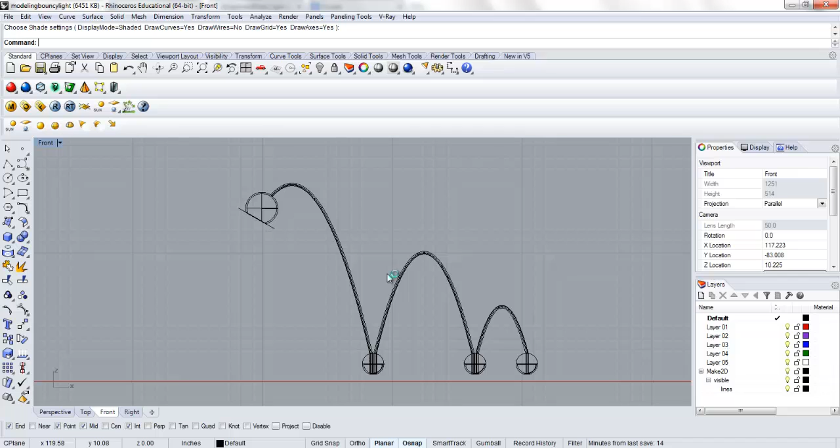Alright, so this tutorial is going to go through setting up your planar drawings. So you've obviously gotten this to a point where you've started to model this. I'm just going to go ahead and steal Alex's, since she sent me her stuff for 3D printing.

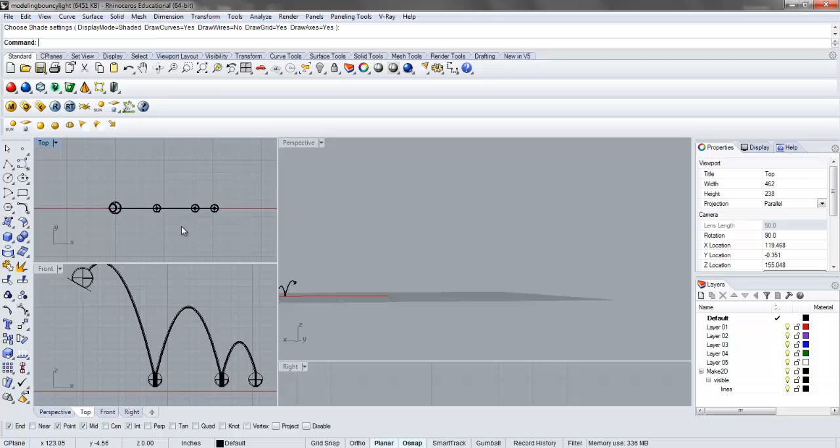So what we're going to be looking at is I'm going to go into an elevation view, and I can go into a plan view for this. I'm going to set this up so that we can actually get these guys out, and do this all at once to make it easier on us. So I take this, first I need to set up an elevation, and I'm just going to copy this away — you'll see why in a second.

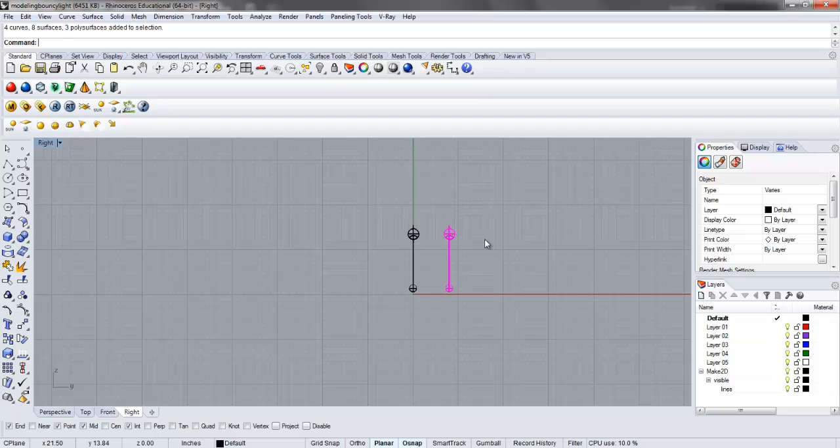Since the drawing requirements dictate it's going to be a plan and an elevation, I can go ahead and rotate this up, and get these all together at the same time. There's going to be a reason for this, and I'll show you here in a second.

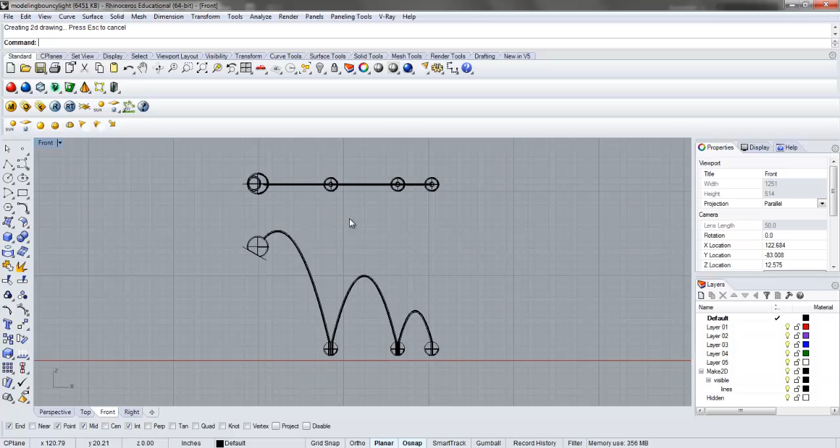Since there's two copies of this, I can use the Make2D command and just make this 2D. What that's going to do, as I go into my plan view now, is take and render out all of the lines here, and divide this up into hidden layers as well, so I can see the guts of this if I want.

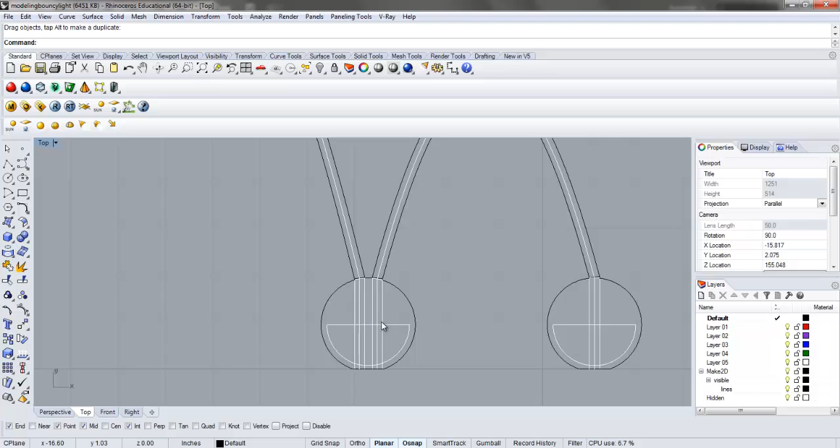So if Alex wanted to take a section through this, she could generate the hidden line drawings and actually start to poche and fill this in. I don't really care about that, so I'm going to go ahead and just turn that off.

You can see we now have a really nice elevation, clean and crisp, with some exceptions here — looks like I had some curve left over. I'll go ahead and delete that out. From there, I can go ahead and see.

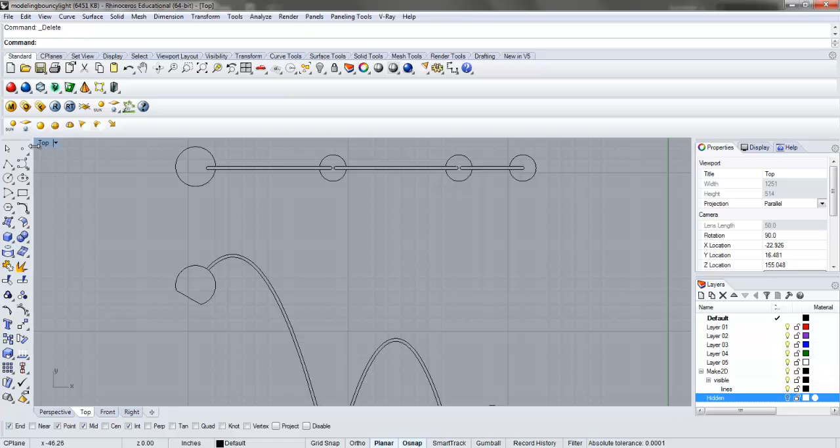Sorry, I don't have as much real estate on this screen. I can go ahead and just take this over, and if I pull this down, you can see that I have some things that have been lined up and aligned in here.

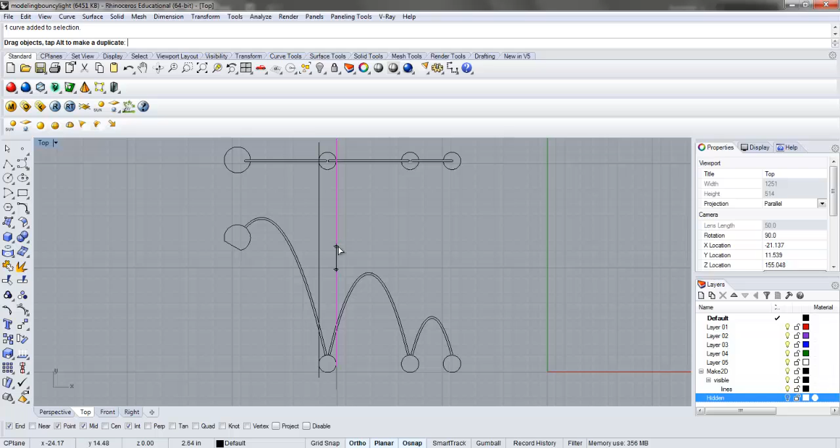Now, from there, if I'm clever, I can start to draw a couple of reference lines that I can then use — I'll turn them into dash lines as we go through this.

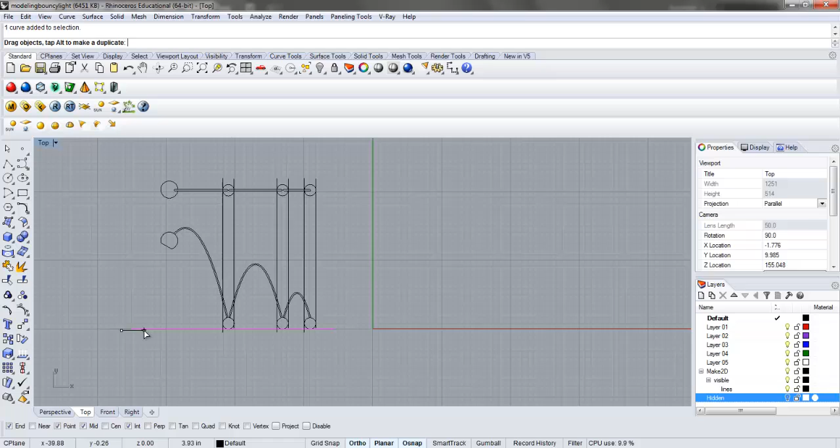Alright, and then we're going to do the same down here. Shift and drag that over. Move from intersection, and I'll turn on my tangent snap for a second here, and move it to the tangent so we can get the object height.

Alright, so from here we can go ahead and dimension things. Oops, I actually used my object snaps — we can find out the 17 and 13/16. If we go and say from this endpoint, we can figure out those dimensions.

And then we can also use that to start to extend over and down some of these reference lines, so we can actually start to dimension out our drawing.

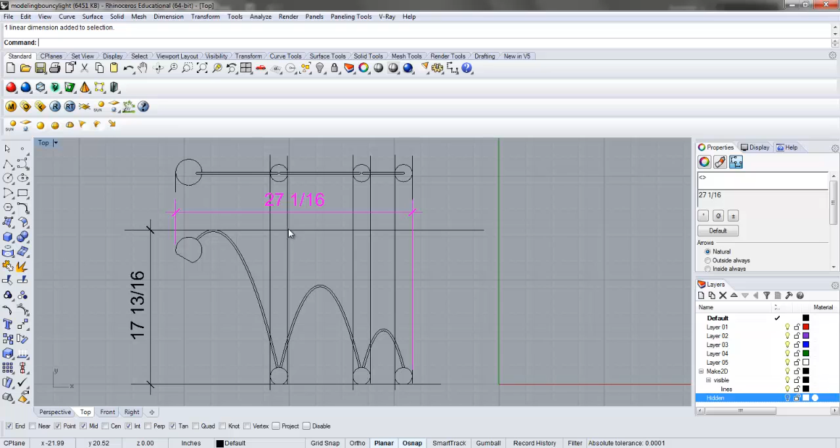So we can do this and set this up for ourselves here, but this kind of looks like crap if we start to look at it. So what we may end up deciding is that we want to take this drawing into Illustrator and really give it some nice line weights.

So I'm going to go ahead and take this and export it as an Adobe Illustrator file, and we'll call this Alex Elevations. We're going to hit save.

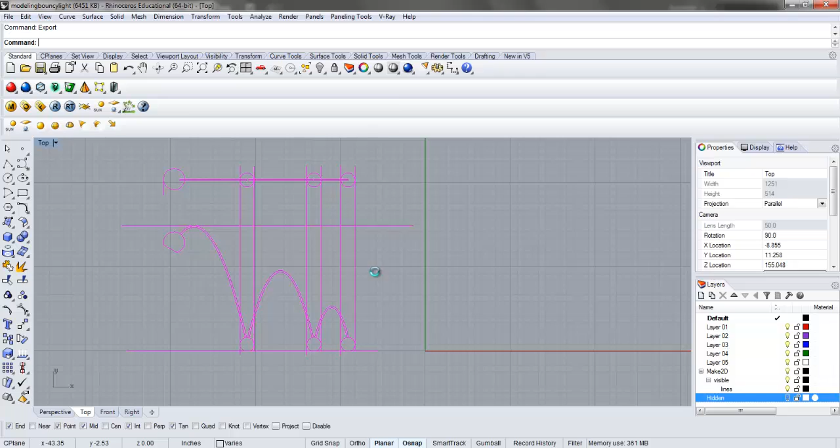Now it's going to ask us if we want to preserve the model scale, and we do — 1 inch equals 1 inch. That means it's only going to ask us that when we're in orthographic projection views, like top, right, or side. It does not give that option in perspective, for obvious reasons.

So since we know we want to set this up, the drawing requirements are set to go 1 inch equals 2 inches, or we want a half scale.

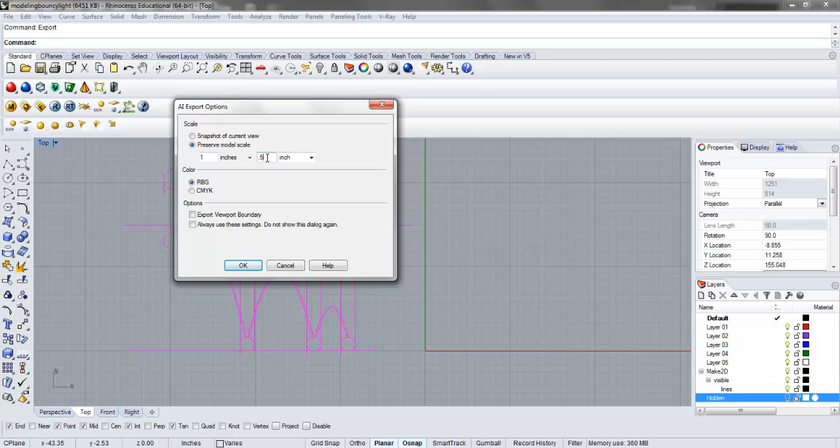Alright, so then we're going to go ahead and hit Control O, and we're just going to go and find that file, wherever I exported that to — it's on my desktop. So I scroll down here, Alex Elevations.

I'm going to zoom out, and I now have this really nice — oops, Control A — and I'll just grab that and move it into here. We can start to set this up really, really nicely.

Alright, so then we can start to get in here and really start to play with the line weights. Say I want this to be a dashed line — I'm going to make that like a 20-point gap.

Get this stuff to align. Just grabbing these anchors and then I can move them. Use the direct select tool. I can change my mind, just use the basic selection tool, and once you have that going, you should be able to align these things. And obviously you can do this ahead of time.

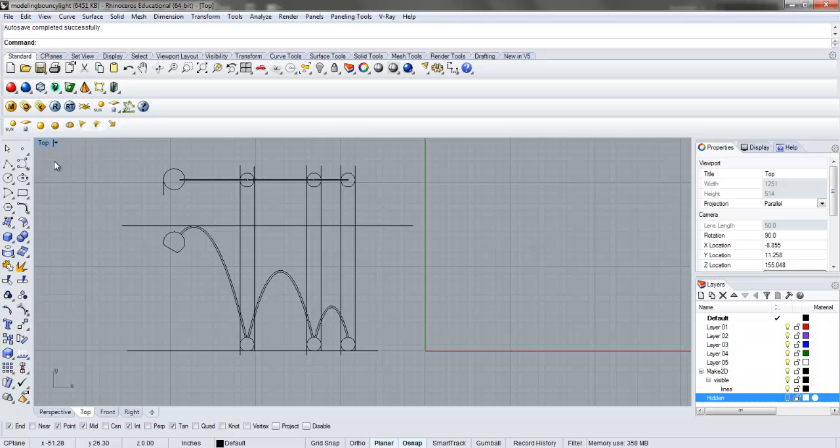And then the other thing we can do here is, since this was out of an elevation, we can come in here and render this out.

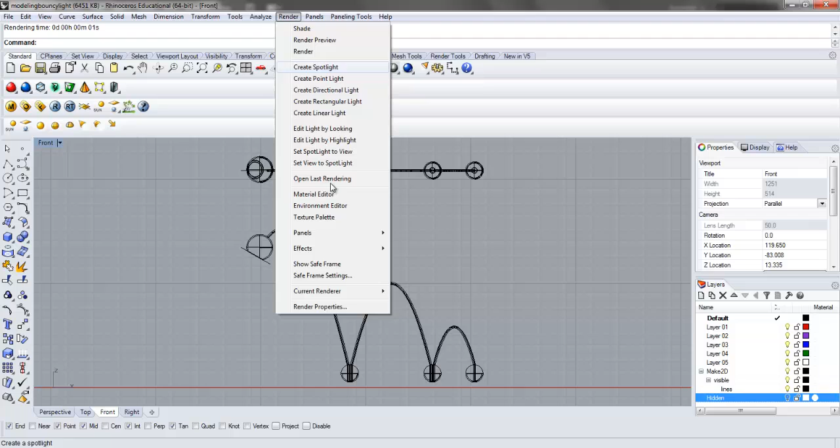Here, sorry, my V-Ray is not loaded, so I'm going to do a crappy render here. So kind of a craptacular rendering. I'm going to remove the backdrop here, so you can set this to transparent backdrop. Hit OK, and then it's going to pull that up again. Let's hit render.

We'll save this out to the desktop, and we've got to save this as a PNG in order to maintain the transparency on that. Otherwise it will appear black if you save it as a JPEG. So we'll call this Alex.

We'll pop back in here, hit Control O, and we'll go and find that image. And there, now I have this all rendered out. So hit Control X to cut it.

And then I'm going to use my layers in here. Pull that up, I'm going to create a new layer. And I'm going to put that underneath our other guys. I'm going to lock these guys so I don't mess with them on accident.

Hit Control V, and if I hold Control Alt, I can scale this up from the center. And you can tell that I haven't rendered this out fantastically. Okay, so then we can just sort of position this in. And if I zoom out here, we're close but not quite there yet. Oh, a little too big. There we go, we'll call that just right.